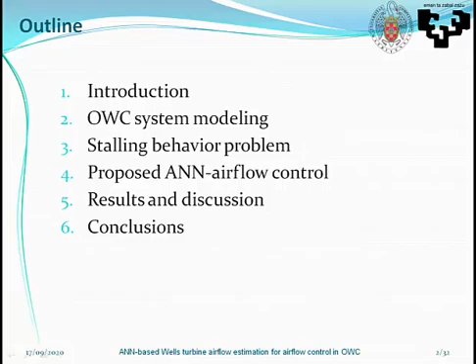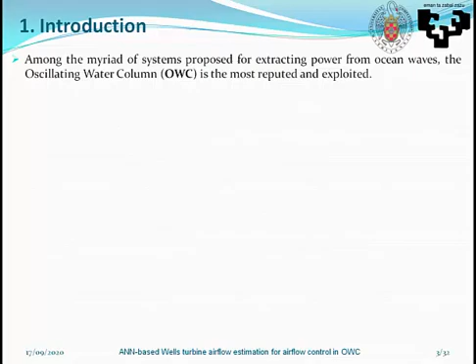Among the myriad of systems proposed for extracting power from ocean waves, the oscillating water column (OWC) is the most reputed and exploited. NEREIDA is a wave energy harnessing project installed in the breakwater in the harbor of Mutriku in the northern coast of Spain by the Basque Energy Agency (EVE) since 2011.

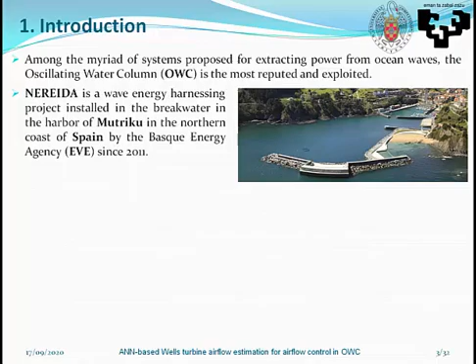The wave power plant is formed of 16 units of OWC, each containing a turbogenerator module of 18.5 kilowatts. Many research and studies were conducted and proposed in order to control and optimize the power output of the plant. In this context, the research work presented deals with the modeling and the artificial neural network airflow control of the OWC plant.

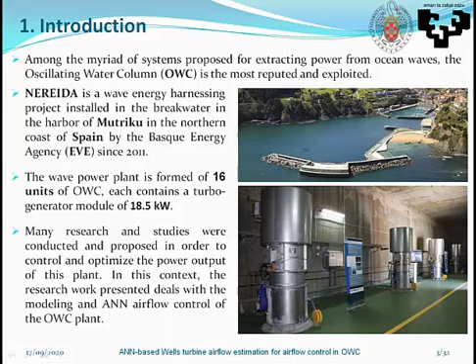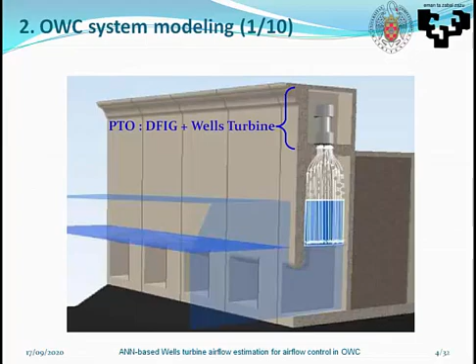Moving on to the OWC system modeling. The OWC consists of two main parts. The first part is the PTO, the power take-off system, containing a doubly fed induction generator driven by a Wells turbine. The second part is the capture chamber, an enclosed chamber with an opening below the sea level to harness the energy of incoming waves. The oscillation of the waves will compress and decompress the air in the top of the capture chamber, causing the turbogenerator to rotate and produce electrical power.

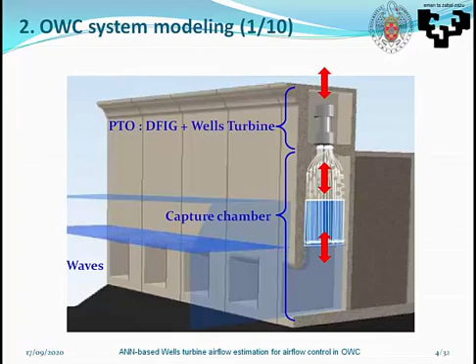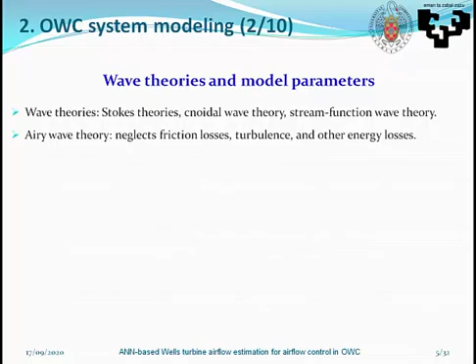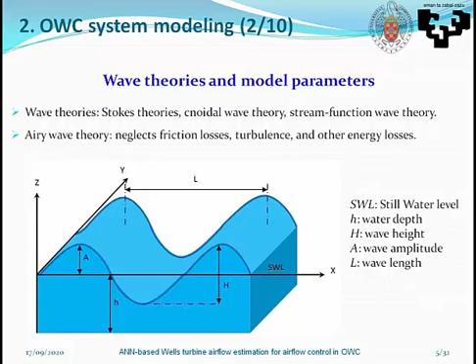The first thing to model is the wave input. There are many wave theories in the literature, like the Stokes theories, the cnoidal wave theory, the stream function wave theories, etc. But in this work, we use the Airy wave theory, which neglects friction losses, turbulences, and other energy losses. The Airy theory is sufficiently accurate for many engineering applications, and for this theory, the wave model is described as a function of wave amplitude A, wavelength L, wave period T, and water depth h.

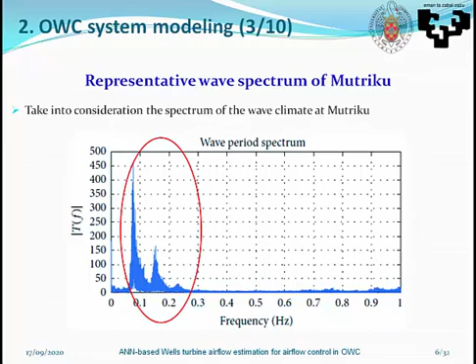To customize the wave model to the waves at Mutriku, its representative wave spectrum has been taken into consideration to set the parameters of the model. Using the Airy theory, the temporal variation of the wave can be defined as follows. When adding the spatial dimension to the wavefront, the expression becomes this way. And by substituting the wave number k, the wave model expression becomes this way.

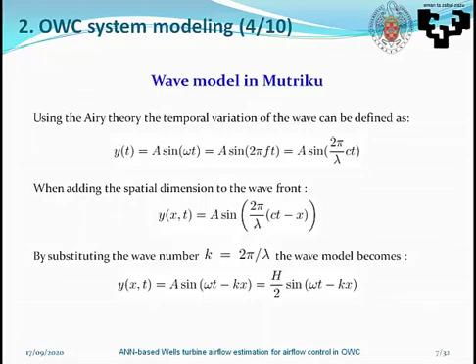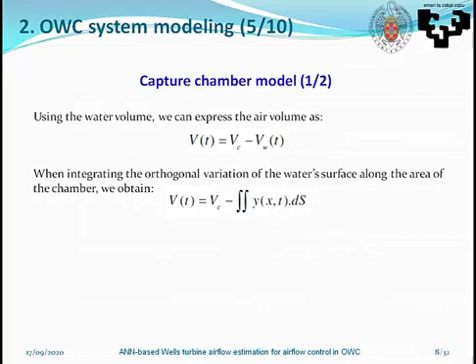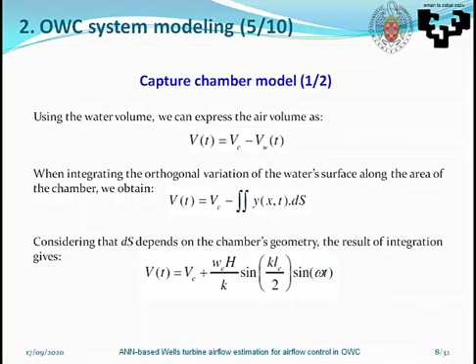Moving on to the capture chamber model. Using the water volume, we can express the air volume as the capture chamber volume minus the water volume. When integrating the orthogonal variation of the water surface along the area of the chamber, we obtain this expression. And by considering the chamber's geometry, we obtain this expression. Hence, we can define the volume flow rate by this equation. And finally, the axial flow rate can be defined by this expression Vx of t.

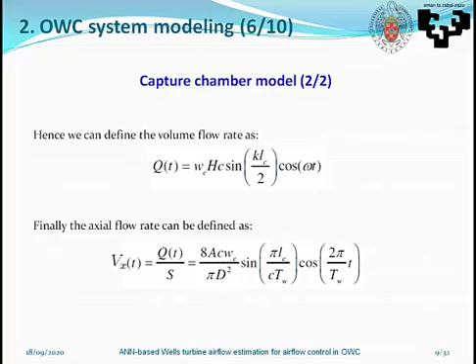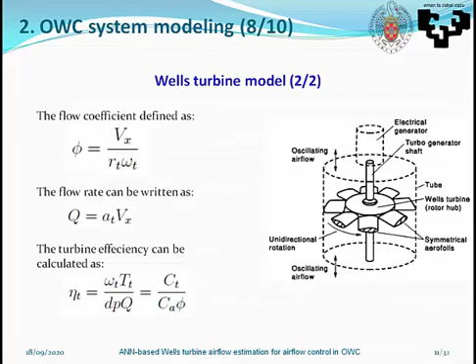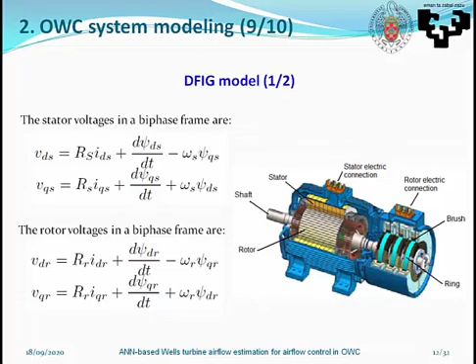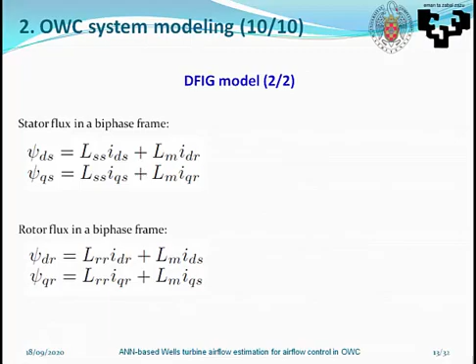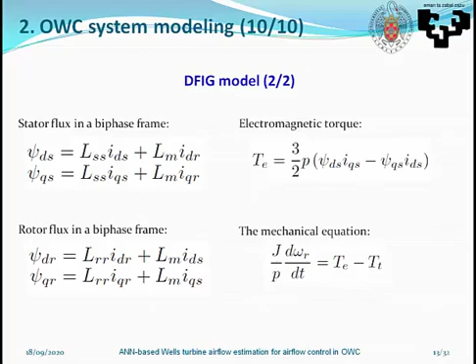Now, the doubly fed induction generator model. The stator voltages in a biphase frame are defined by these expressions, and the rotor voltages in a biphase frame are defined by these expressions. The stator flux are defined as follows, and the rotor flux are defined by these two equations. Then we have the electromagnetic torque and the mechanical equation relating the torque to the rotational speed.

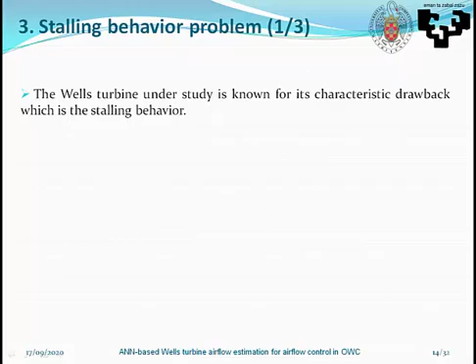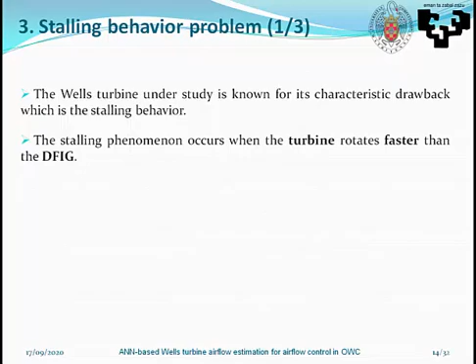Now let's explain the stalling phenomena. The Wells turbine under study is known for its characteristic drawback, which is the stalling behavior. The stalling behavior occurs when the turbine rotates faster than the generator. This may be explained by the characteristic curve of the Wells turbine featuring the torque coefficient versus the flow coefficient. In this curve, we can see that after a critical value of the flow coefficient of 0.3, the torque coefficient will start to decrease drastically, and this will decrease the produced torque.

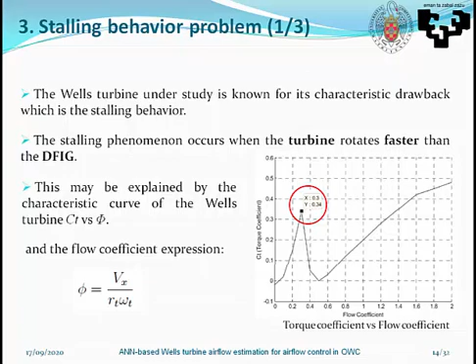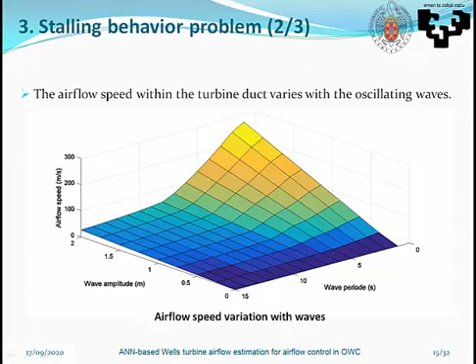Knowing that the flow coefficient expression is a function of the airflow speed divided by the rotational speed, it is clear that we have to control the airflow speed. The airflow speed within the turbine duct varies with the oscillating waves. In fact, the higher the wave amplitudes are and the smaller the wave periods are, the stronger the waves will be, and hence will have a higher airflow speed. This high speed will provoke the stalling behavior because the generator can't keep up with this velocity.

A simulation in the uncontrolled case with two sea conditions shows the impact of the stalling behavior on the mechanical output. For this, we consider two waves: the first with a wave amplitude of 0.8 meter, shown in blue, and the second with a wave amplitude of 1.25 meters, shown in red.

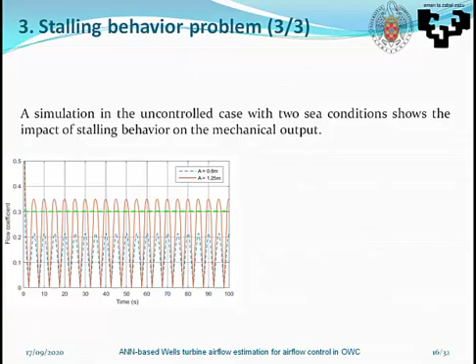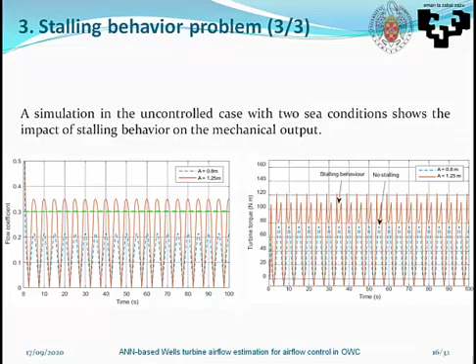We can see that the obtained flow coefficient from the Wells turbine model exceeds the threshold value of 0.3 with the second wave. Hence, the produced torque is affected by the stalling behavior at the crest of every oscillation, which will lower the torque in terms of average value.

The stalling behavior may be avoided by regulating the actual flow speed. This is achieved by controlling the air valve located at the top of the capture chamber. A controller will regulate the measured airflow to a reference value provided by an artificial neural network trained by data obtained from an acoustic Doppler current profiler.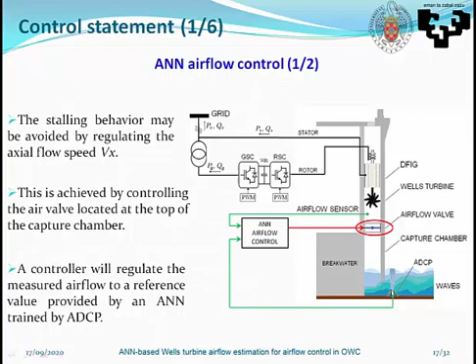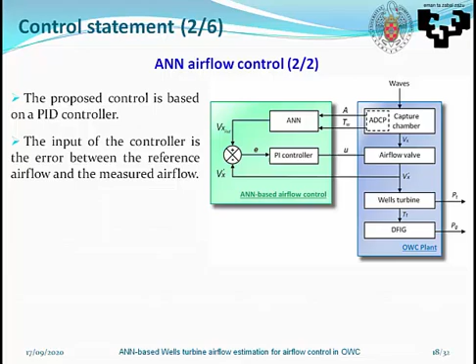The proposed control is based on a PID controller. The input of the controller is the error between the reference airflow and the measured airflow. The output of the controller is the control signal of the air valve. The valve will rotate according to the desired airflow speed.

An artificial neural network has been adopted for this control to generate the reference speed Vx, since it has the ability to mimic any complex behavior without specific knowledge of the relationships between the input data and the target data.

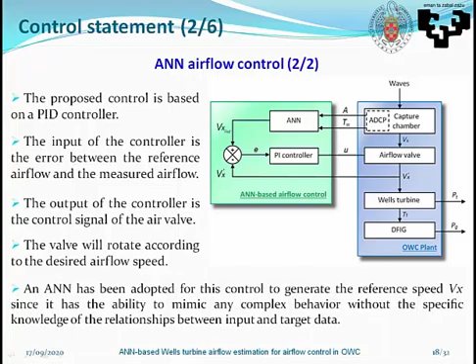The ANN will be trained to recognize incoming waves from measured data gathered by AZTI-Tecnalia at the breakwater of Mutriku in the northern coast of Spain. Both inputs of the designed ANN are obtained from the acoustic Doppler current profiler installed at the breakwater of Mutriku.

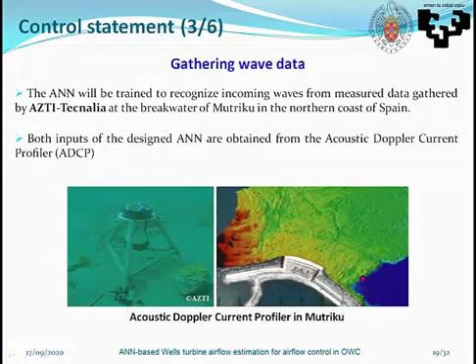The designed artificial neural network will estimate reference airflow speed values for all wave amplitudes and periods, but will also recognize strong waves and provide reference values to limit their airflow speed in order to avoid the stalling behavior.

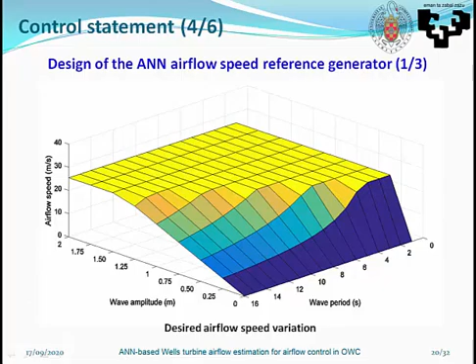An artificial neural network consists of neurons in the input, output, and hidden layers, connected with weighted signals. The neurons consist of a bias value, a sum function coupled to an activation function. The sum function may be defined by this equation.

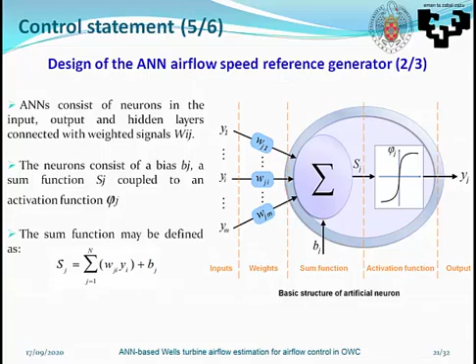The proposed network for the airflow control is a multi-layer perceptron structure with 2 input neurons and 1 output neuron. The update expression of the weights is defined by this expression.

The network has been trained using the Levenberg-Marquardt algorithm, which aims to minimize the performance index by weight correction, defined as follows.

The mean squared error has been chosen as the criterion for the artificial neural network model to be used in the proposed airflow control.

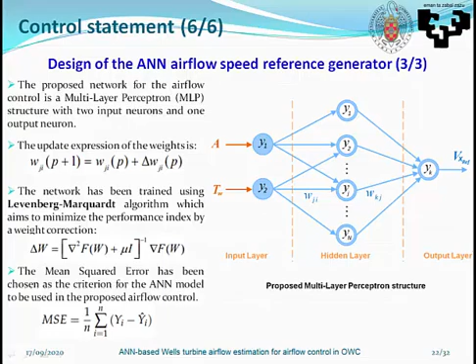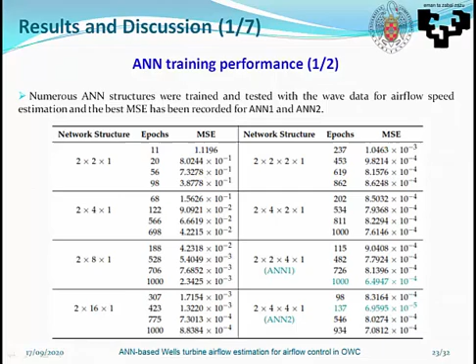Numerous artificial neural network structures were trained and tested with the wave data for airflow speed estimation, and the best MSE has been recorded. From this table, we can see that the best MSE has been obtained with ANN1 and ANN2, and for this reason we will further investigate the performance of these two structures.

When observing the training performance of both ANN1 and ANN2, it is clear that ANN2 managed to provide better performance at 137 epochs. Hence, for the proposed ANN airflow control, the structure ANN2 has been selected.

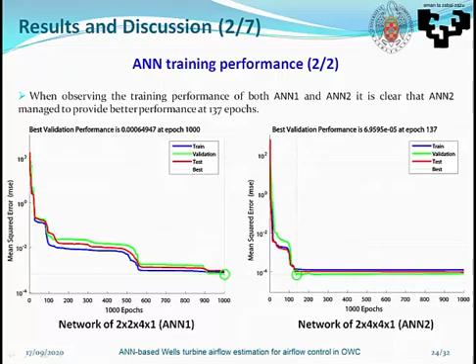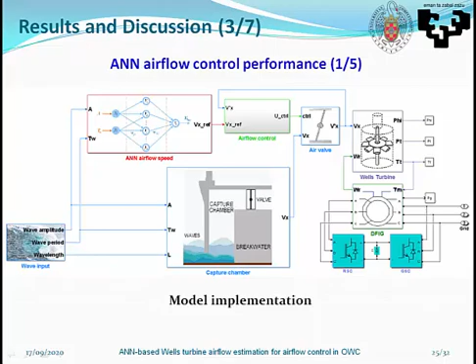Now let's see the performance of the proposed control with the selected ANN structure. Using the models or the subsystems of the OWC mentioned earlier, we implemented this wave-to-wire model on MATLAB Simulink. We configured the model with parameters obtained from the Nereida wave power plant in Mutriku.

To test the control, we used two waves: the first with a 0.8 meter wave amplitude, followed by a 1.3 meter wave amplitude. The obtained flow coefficient in the uncontrolled case with the second wave exceeds the threshold value.

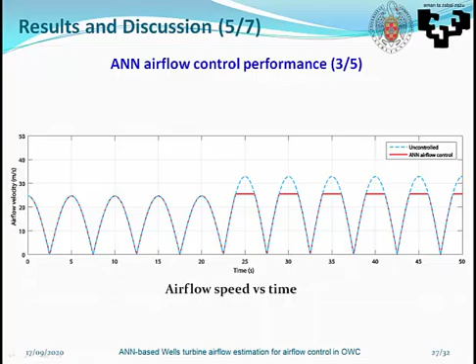This activates the airflow control in the controlled case, and the flow coefficient is then adjusted to 0.3. This is thanks to the artificial neural network airflow generator, which stopped the strong airflow as shown in this figure.

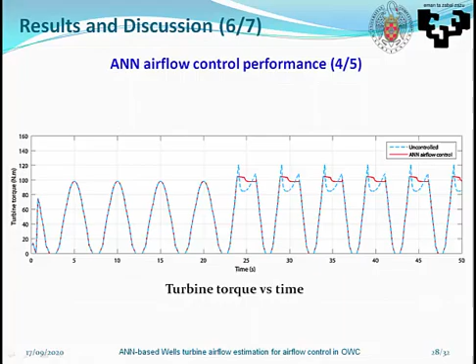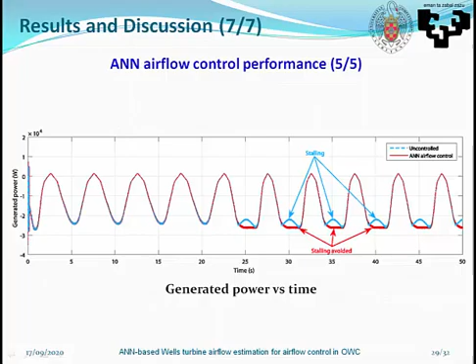The obtained torques avoided the stalling effect and maintained higher values. Hence, the resulting generated power is higher in the controlled case than the uncontrolled case, as shown in this figure.

So to conclude, in this paper, an oscillating water column plant has been modeled and controlled by an artificial neural network airflow control strategy to avoid the stalling behavior and improve the generated power.

The designed artificial neural network has been trained using real wave data gathered by an acoustic Doppler current profiler at the site of Mutriku. The plant model and control were tested under sea conditions provoking the stalling behavior, and results show successful avoidance of the stalling behavior and power improvement.

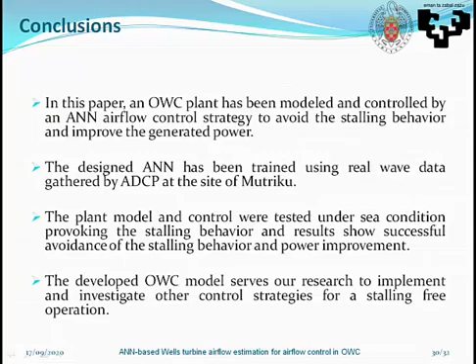The developed OWC model serves our research to implement and investigate other control strategies for stalling-free operation. Thank you very much for your attention.